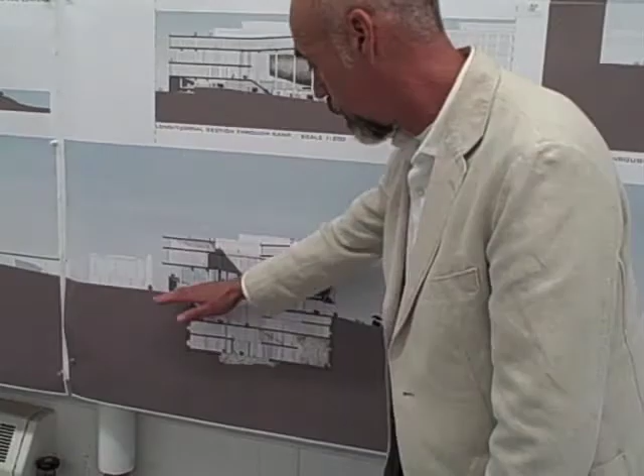After it is designed, but before it can be occupied, a building must be constructed. This is the story of the construction of Milstein Hall at Cornell University.

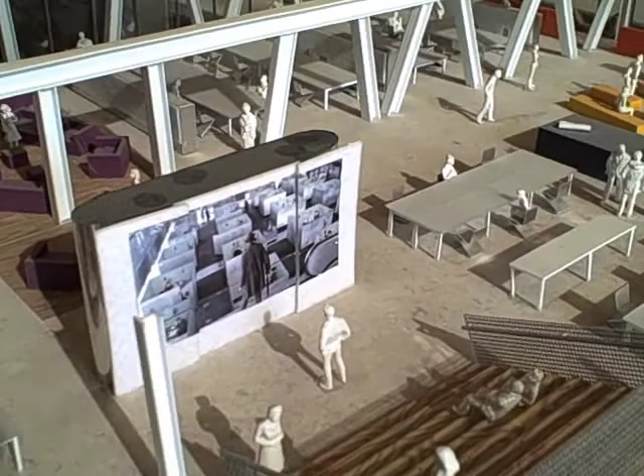The heart of Milstein Hall is the upper-level floor plate devoted almost entirely to the architecture department's design studios. Unlike the concrete lower-level slabs at the first floor and basement, or the concrete dome, the second-floor studio spaces are contained within and supported by a steel frame. The construction of this steel superstructure was described in a prior video in this series.

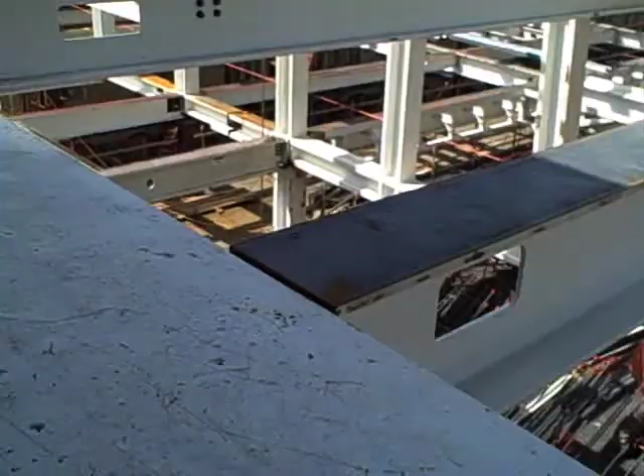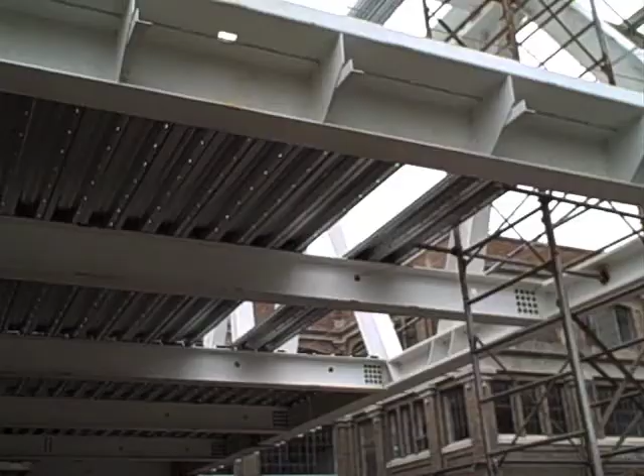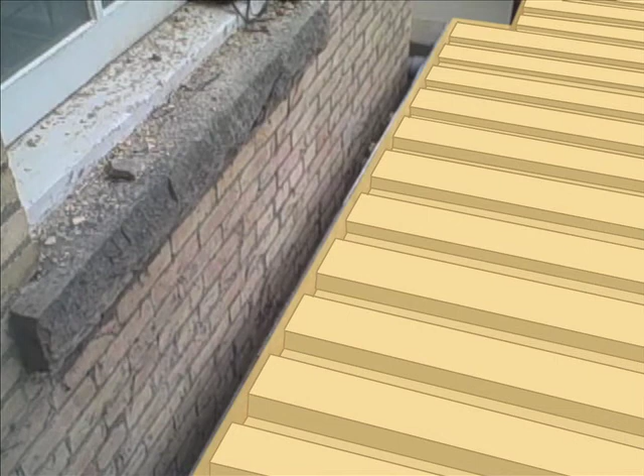To quickly review the process, steel beams, girders, and rigid frame trusses are put in place. Then corrugated steel decking is welded to and made to span between the beams. Welded steel plates are fastened to the steel beams to form vertical edges to the corrugated slab. Otherwise, the concrete cast on top of the deck would not be contained. Notice that there is a substantial gap between the edge of the Milstein slab and the wall of the existing building in order to allow for movement.

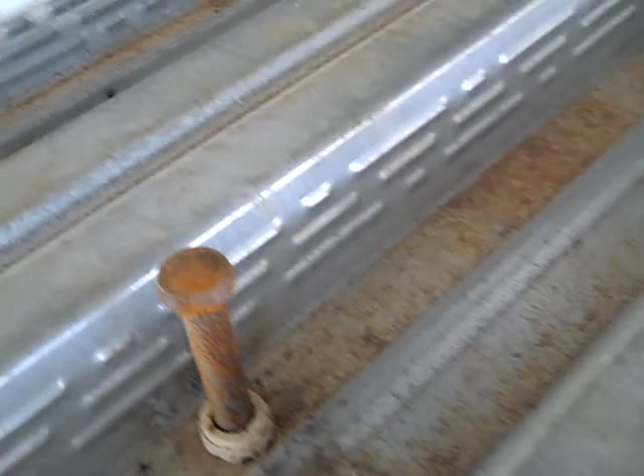Shear studs are welded to the girders and beams through the steel deck so that these steel beams become integral with and can act compositely with the concrete deck. In other words, the concrete above the beams becomes part of the beam or girder profile, increasing its strength in bending and its resistance to deflection.

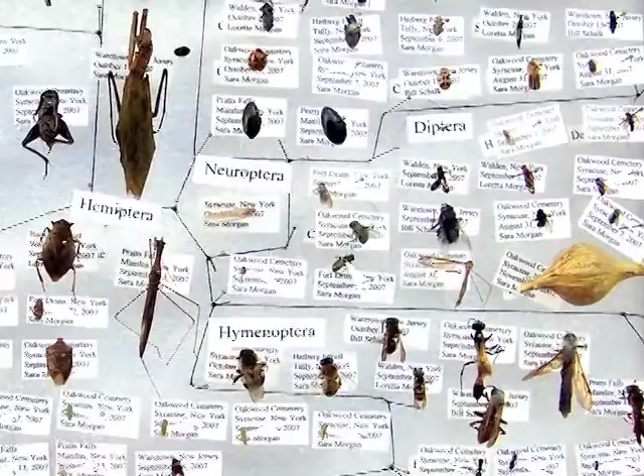While the steel floor structure is for the most part hidden by the building's cladding and soffit material, it is not entirely forgotten. Glass fascia panels at the rectangular floor opening for the stair reveal these girders, beams, and bolts in all their utilitarian and pragmatic glory. Even ordinary construction details get their 15 minutes of fame. Unfortunately, these open glass panels can also trap moths and other creatures, potentially turning this exhibition of structure into an entomological display case.

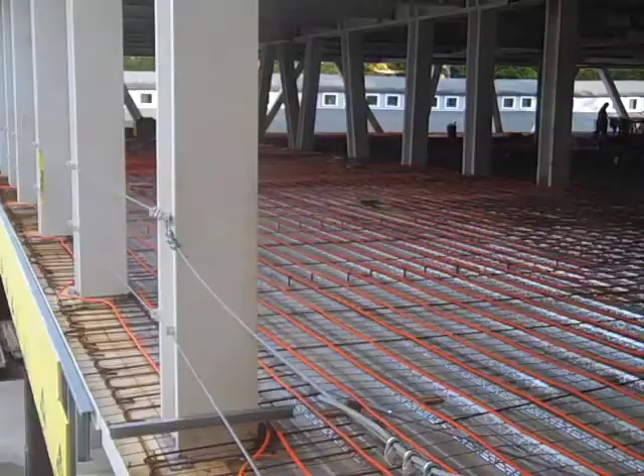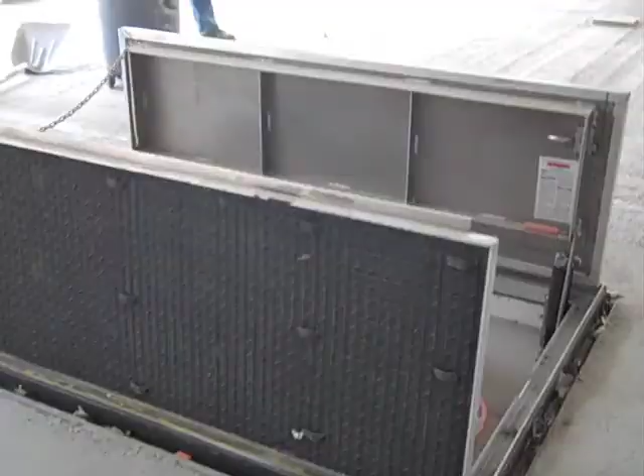This floor also functions as a radiant slab for heating during cold weather. For this reason, PEX tubing, made from cross-linked high-density polyethylene, or HDPE, that is melted and then continuously extruded, is used to bring heated water into the slab. It is placed over the metal deck and will be embedded within the concrete. These tubes terminate in manifolds that are accessible through steel doors built into the future concrete slab. Here we see the access panel box from the bottom, looking up from the first floor. Electric conduits, floor-mounted electrical outlets, and hard-wired data cables are also placed over the metal deck.

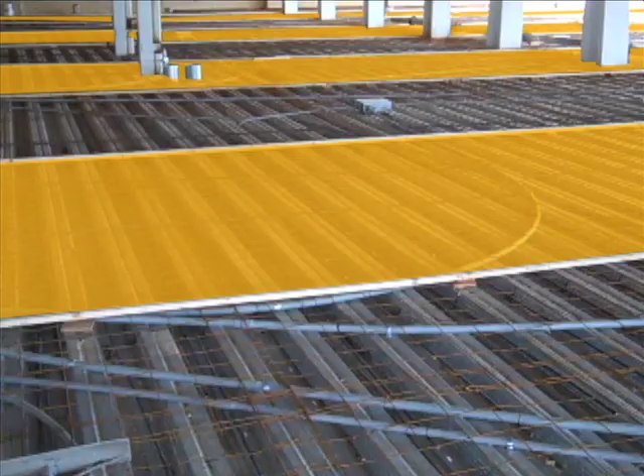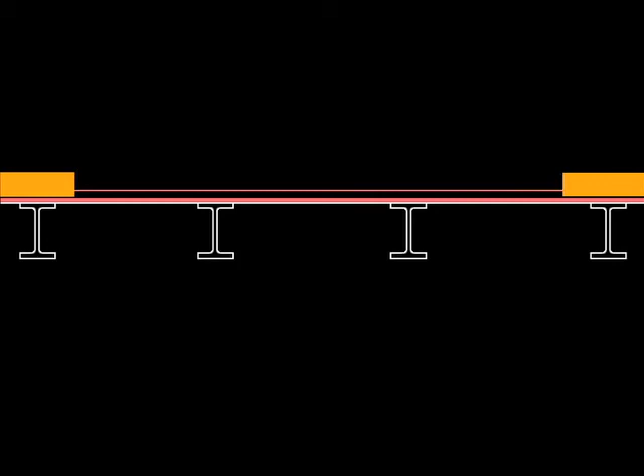Once all these electrical and mechanical elements are properly positioned, concrete is cast over the metal deck in alternating bands defined by temporary wooden edge forms that are aligned at the precise height of the structural slab. The first batch of alternating concrete bands are cast. Once they harden sufficiently, the wooden forms are removed and the edges of the hardened concrete serve as forms for the remaining bands. Looking through the window from Sibley Hall, we can see the concrete being pumped onto the second floor and manually spread over the steel deck.

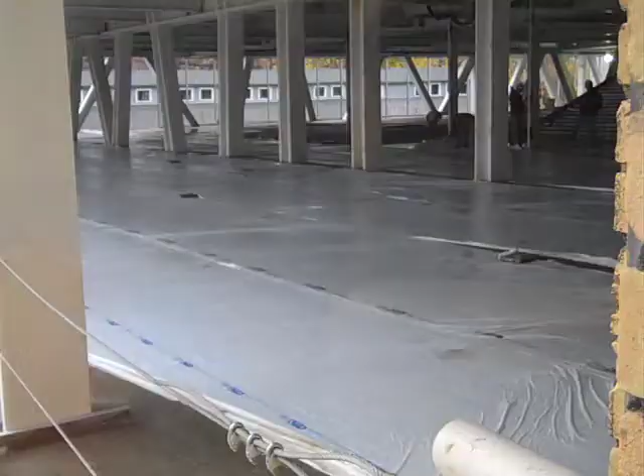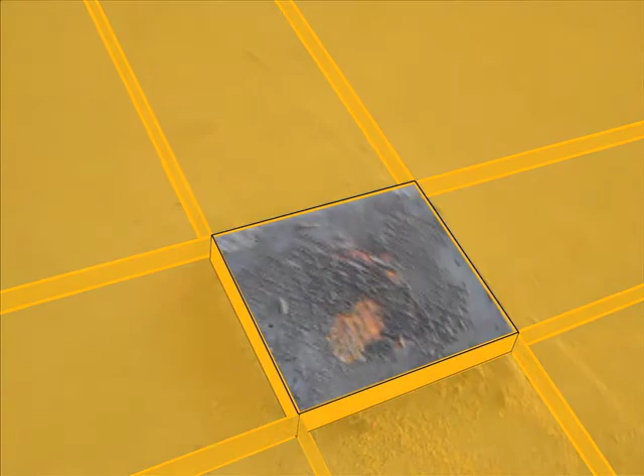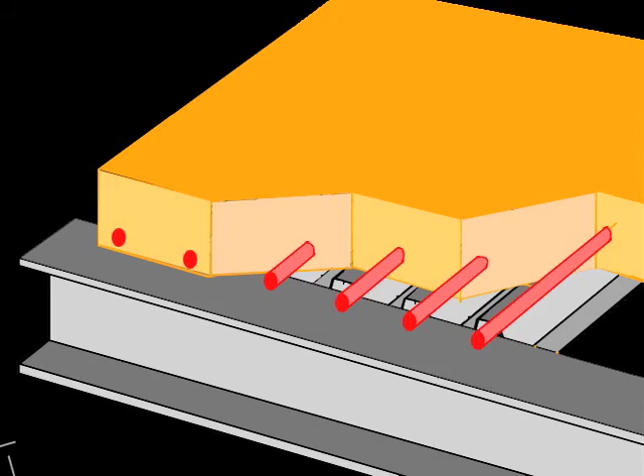A temporary vapor barrier is placed over the concrete to prevent evaporation of water as the concrete cures. The access doors for radiant heating, as well as floor-mounted electric boxes, are a bit higher than the structural slab since they align with a topping slab not yet cast. The steel deck serves not only as formwork for the concrete, but also as tension reinforcement. In other words, neither the concrete nor steel by itself could adequately support the anticipated floor loads. However, the interaction of the two materials creates what is essentially a reinforced concrete slab, with the steel deck taking the place of reinforcing bars.

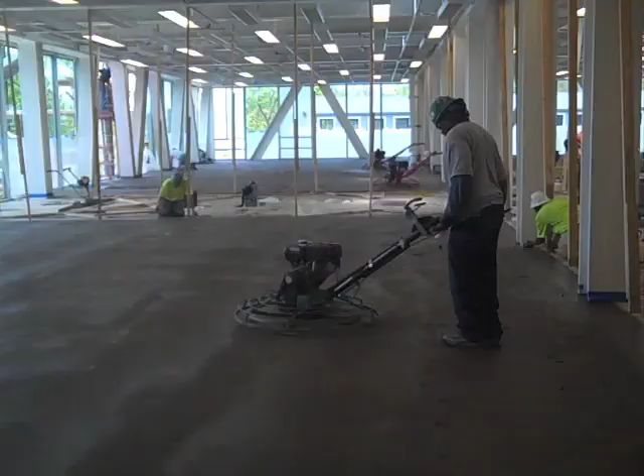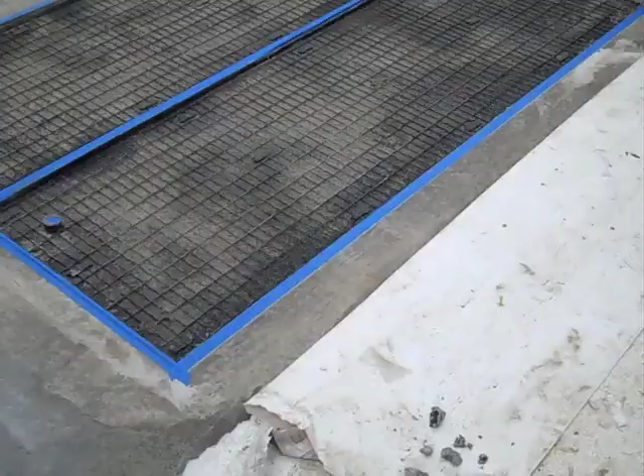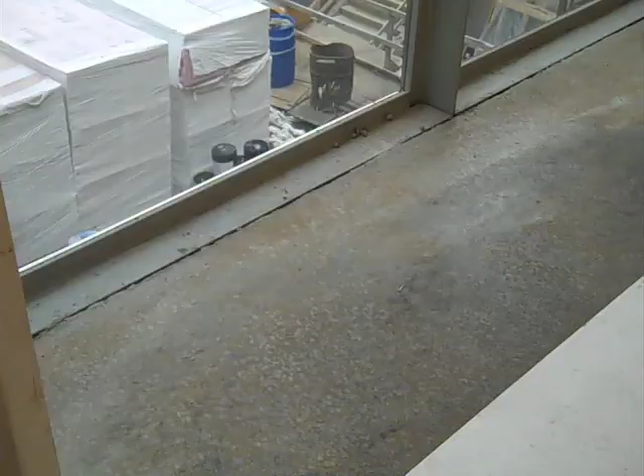Steel welded wire mesh is put in place for the lightweight topping slab, as it was placed in the structural slab below to prevent cracking due to concrete shrinkage. This topping forms the final and finished floor surface for the studio floors. The surface is finished with a power trowel and will eventually be waxed once all the construction on that level is completed. A more specialized topping product, Ardex K15, is placed into the access panels for the radiant heating tubes so that the floor surface seems more continuous. The space between the concrete slab and steel curtain wall framing is filled with a gray sealant. The topping slab, while reinforced, has no control joints, and it has experienced extensive cracking, especially at sharp corners.

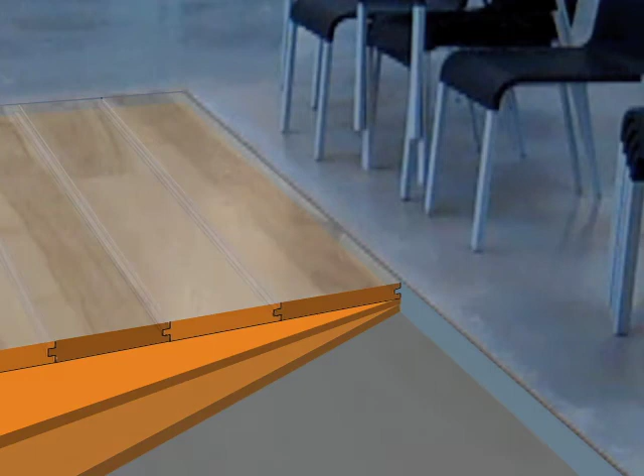One area of the floor plan, designed as a kind of lounge area, will be finished with a wood floor. The wide planks of ash are screwed into 2 layers of plywood, which act much like the subfloor in conventional wood-framed construction. To allow for expansion and contraction, the space between the wood and concrete finished surfaces is filled with cork. As often happens when very wide planks are used, the wood exhibits considerable cupping, as can be seen here.

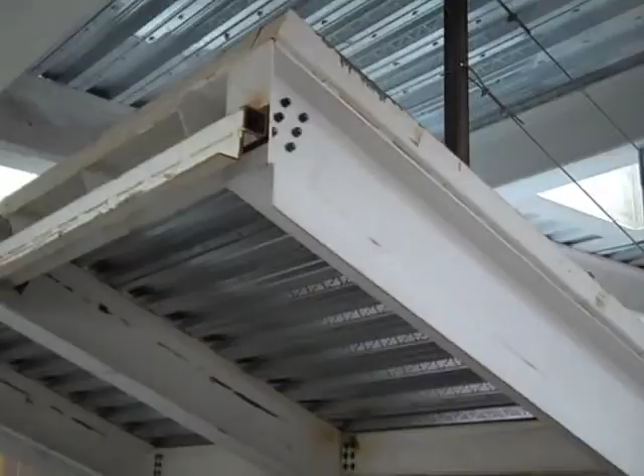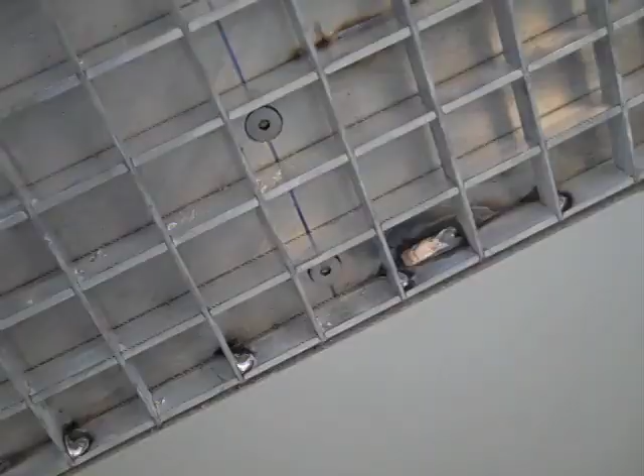This area aligns with a stainless steel covered electrical closet and a small sloped seating area directly over the dome below. The sloped seating area facing this projection screen is first cast as a simple inclined slab on its steel frame. The actual seating is formed with wood, and the edge is lined with aluminum panels. Later, an aluminum gridded egg crate guardrail is screwed into place. An aluminum plate welded to the aluminum egg crate is bolted to a steel plate that has been welded to the steel structure of the inclined plane.

A similarly exposed system of bolted plates is used to attach handrails to the inside plane of the aluminum grid. Unfortunately, this aluminum gridded guardrail didn't really work that well. It was a bit too flexible, and so it was removed during the 2012 winter intersession and replaced with a welded steel version, painted white.

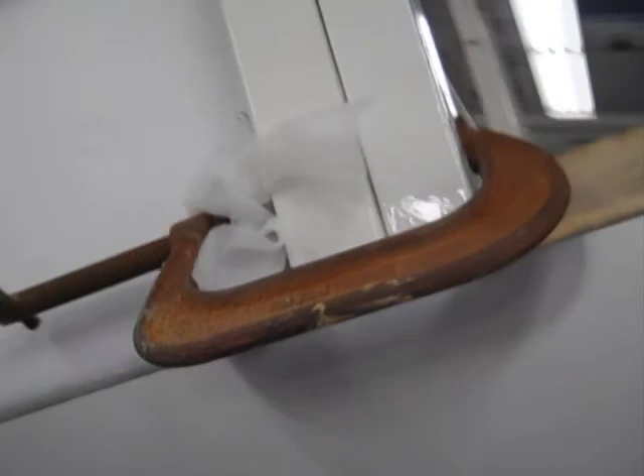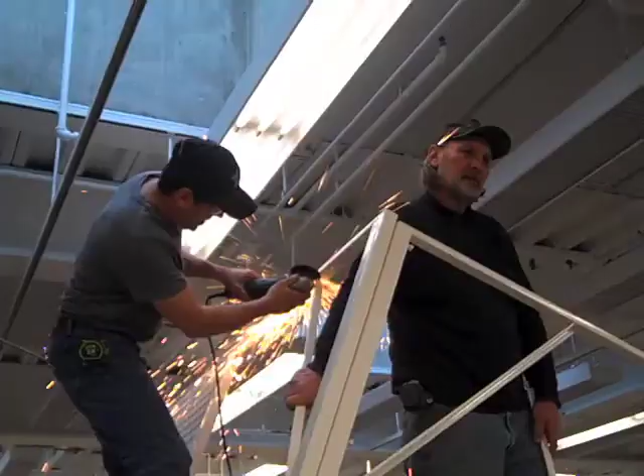This steel frame, temporarily held in place with clamps, will be welded to the same steel plate to which the aluminum structure was previously bolted. Then, painted steel gridded panels will be bolted into these steel posts. Diagonal struts that maintain the desired geometry of the steel frame are cut off once the frame is in place.

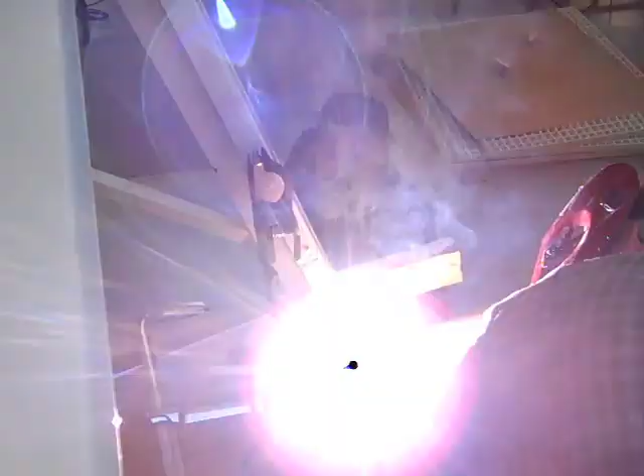The gridded panels are lifted into position and bolted into place. Sometimes the holes need to be enlarged so that the bolts can be made to fit properly. Once the panels and posts are aligned and fitted, the posts are welded in place. The old aluminum handrail is then bolted in place, and, after a bit of touch-up paint, the new guards are complete.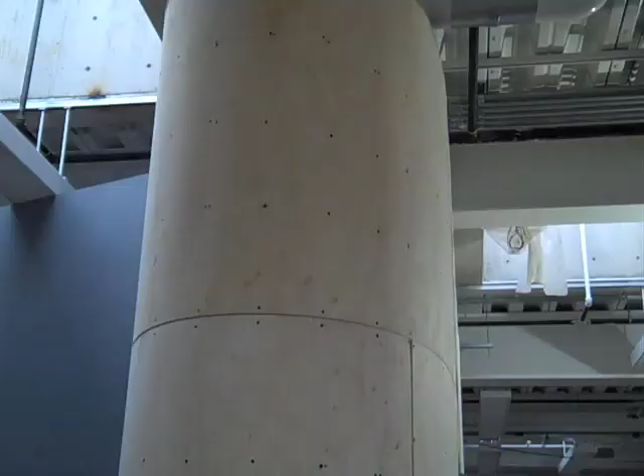The electrical closet is constructed with metal studs and plywood sheathing. Then, polished stainless steel panels are glued to the sheathing. Doors facing the sloped seating area can be opened to create a projection screen. This screen faces the sloped seating.

Aluminum panels are fastened to the inclined steel structure, and glass walls and doors provide acoustical separation from the auditorium below. At the time of this filming, the joints where the aluminum panels intersect seem a bit sloppy. This detail is on a so-called punch list, that is, a list of items not meeting the requirements of the drawings and specifications that will be fixed by the contractors once students leave for intersession. Here we see the corrected detail, a bit better than before, but still not perfect.

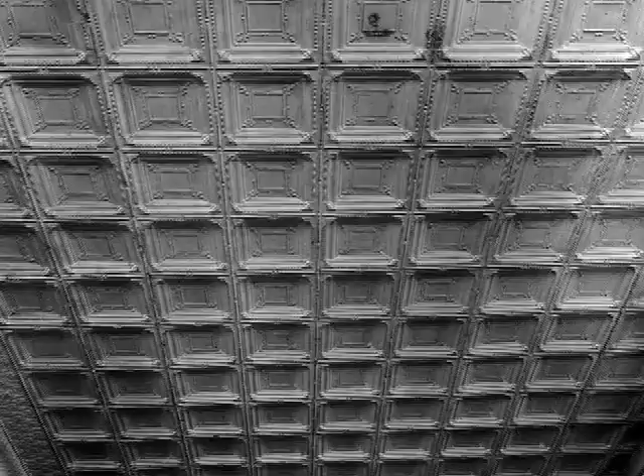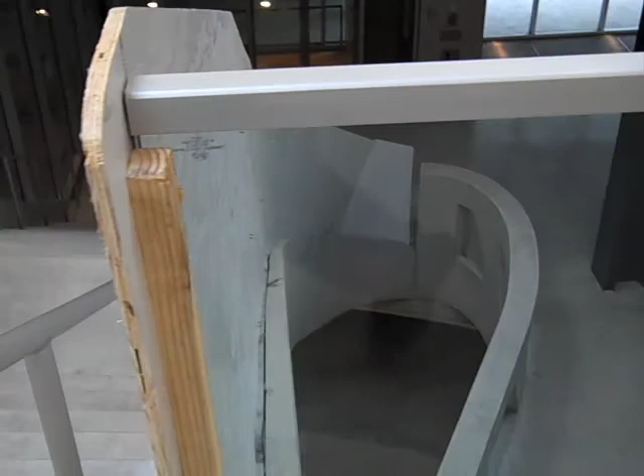Stamped aluminum panels, resembling a 19th century tin ceiling on steroids, form the underside of the sloped plane, matching the ceiling treatment on the auditorium below and the rest of the first floor soffit. Glass guardrails set into aluminum channels protect the openings around the entrance stair, with plywood standing in temporarily for some missing glass.

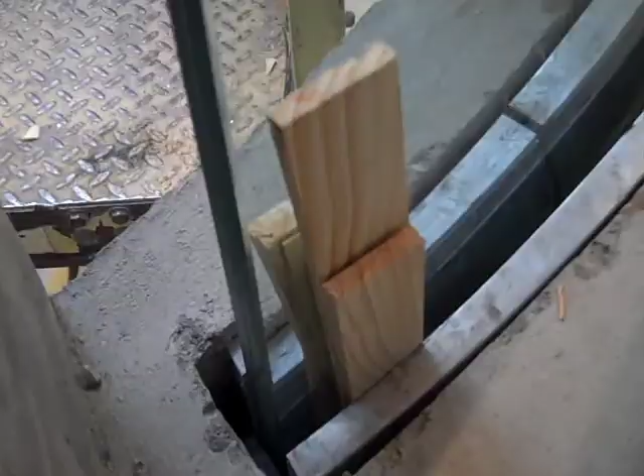Here we can see the installation of curved and sloping glass guards for the stair leading up to the studio floor. Temporary wooden shims are used to align the glass panels within the aluminum channels. Other ad hoc methods are also employed for this purpose. While ordinary shims and gaskets are used for the standard straight glass guards, the curved ones require a more handmade approach.

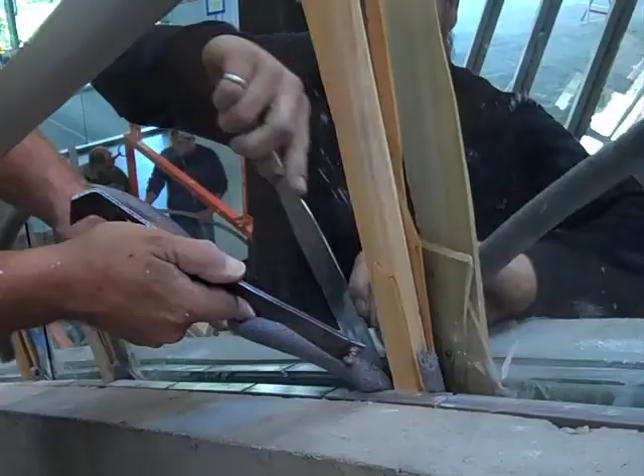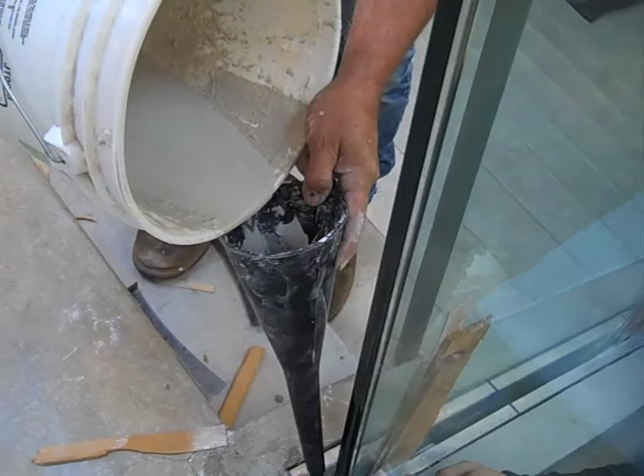After a backer rod is inserted into the floor-mounted channel and the glass is pushed into place using scraps of wood, an anchoring cement is mixed and then poured into the floor-mounted channel to secure the glass. Then, the aluminum channel cap is painstakingly cut, ground, and bent by hand until it fits the curve of the glass. A black sealant is used instead of the standard black gasket, and an aluminum strip and gray sealant finishes the job.

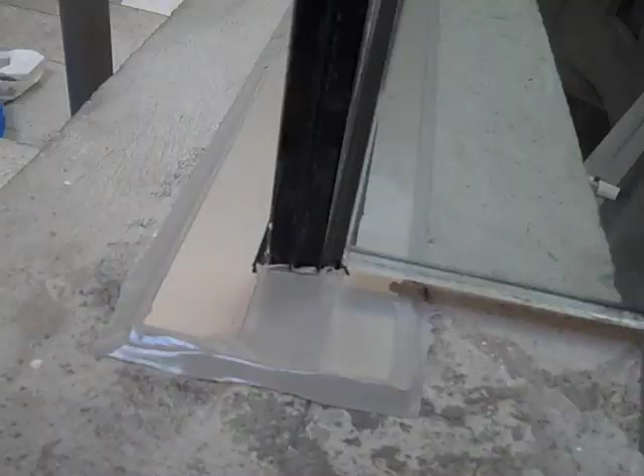Another type of guardrail shows up under the sloping truss diagonals, necessary and required by code so that building users don't hit their heads on the angled steel truss sections.

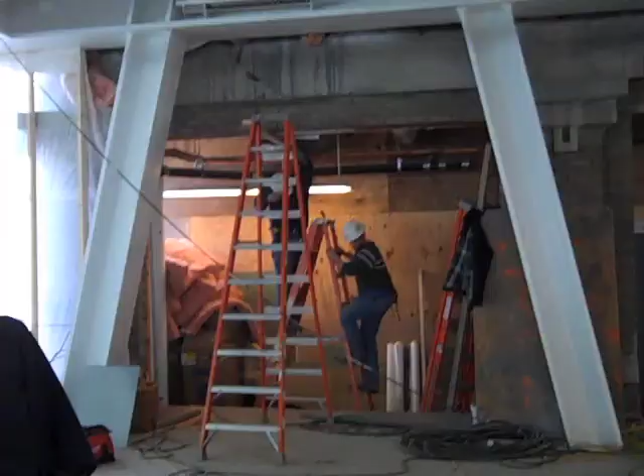Because Milstein Hall is meant to connect East Sibley and Rand halls on their second floor levels, openings must be made through the masonry walls and windows of these two existing buildings. Here we can see the opening being made in Rand Hall. Because it is a steel-framed building, the thick brick cladding can be removed without compromising the building's structure. Both a glass wall protected by a horizontally rolling fire shutter and a 1-hour fire-rated glass door are then installed.

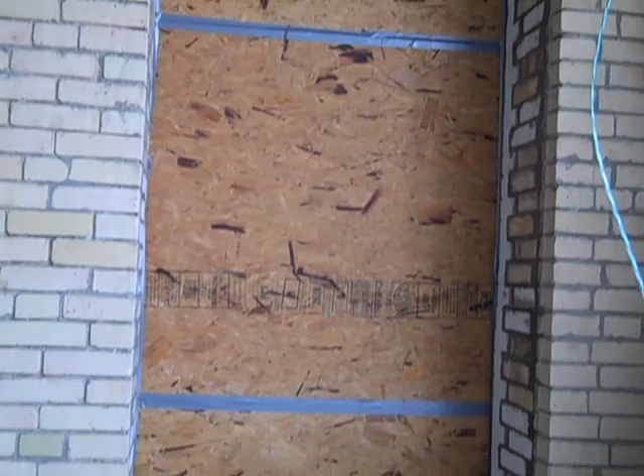At Sibley, an older structure with load-bearing brick walls, two strategies are employed. Mostly, a series of small openings are made by removing brick below existing windows. This minimizes structural disruption to the wall since the windows are already spanned by brick arches. New glass doors with 1-hour fire resistance ratings are placed in these openings.

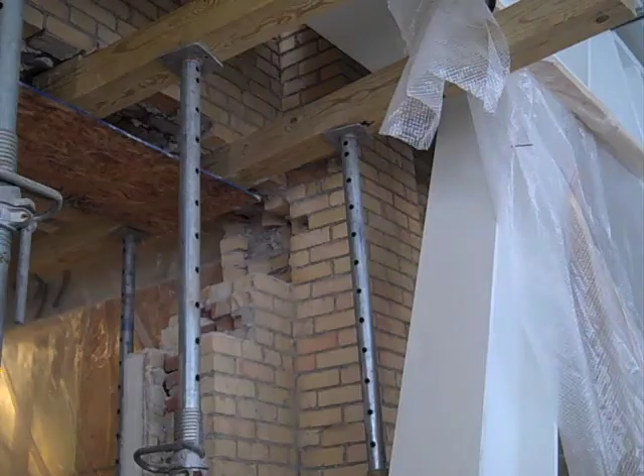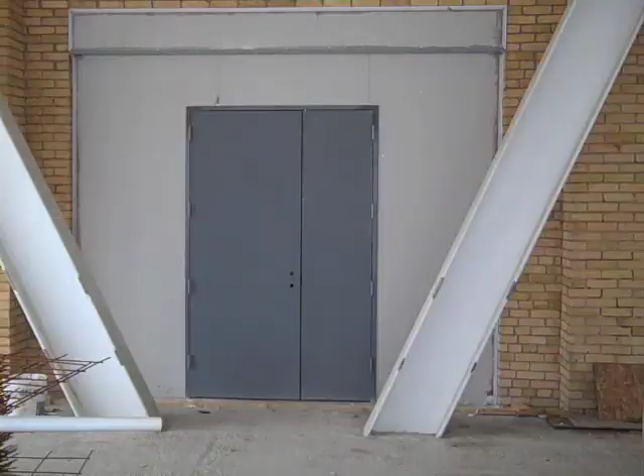At the end of Sibley, a more difficult opening is made in the brick wall. Temporary shoring supports a new, larger opening until a steel lintel can be inserted. After all this effort, it is a bit surprising to see the result. A small steel door is installed within a steel stud gypsum board wall. I've been told that the double-wide glass door that was originally envisioned proved to be too costly and so was replaced with this lower-cost design.

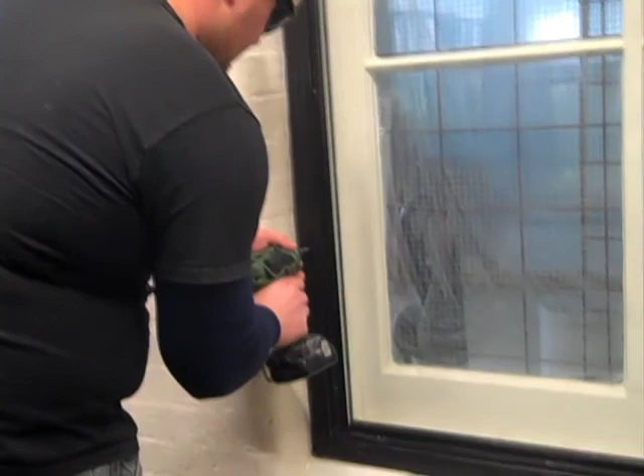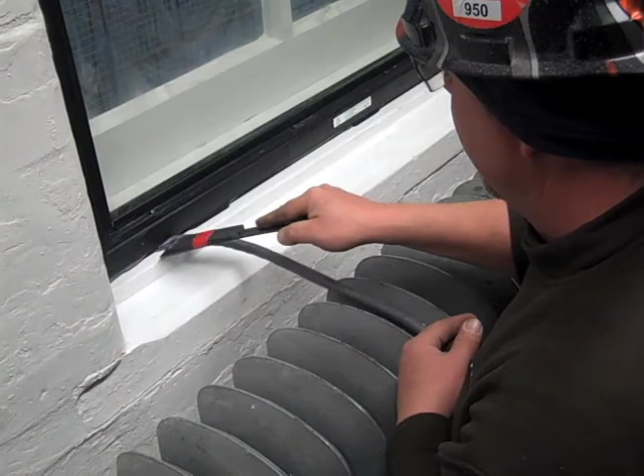To create a 1-hour fire barrier between Sibley and Milstein Halls, the existing windows that are not extended into doors are covered not with 1-hour fire-resistive material, but with 3/4-hour fire-rated glass in a metal frame that is screwed into the existing wooden window frame. Here we see fire-safing material inserted into the space between the glass frame and masonry walls to ensure the continuity of the fire barrier. This fire-safing is then covered with a sealant. Finally, the new fire-rated glass is cleaned.

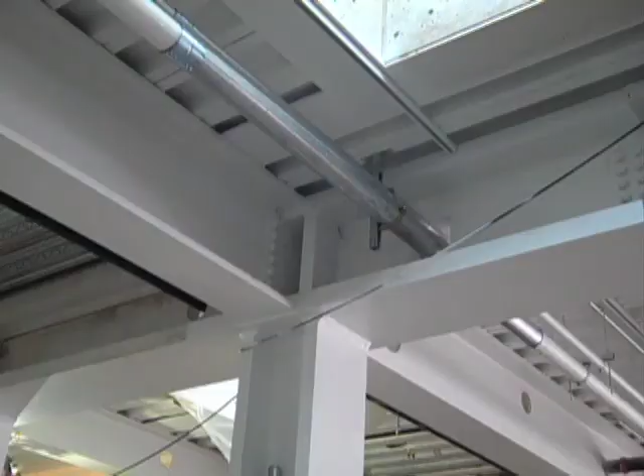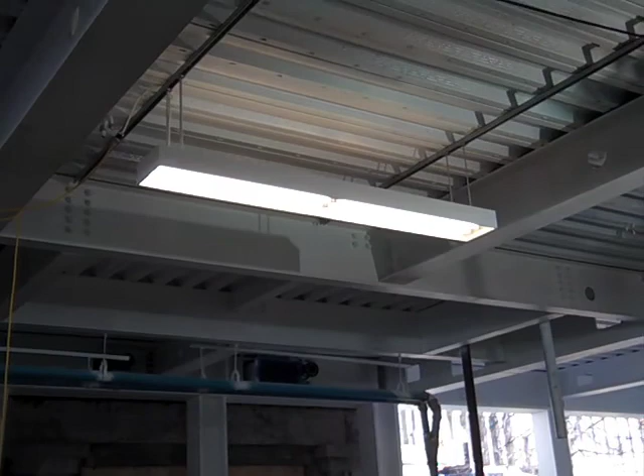That's pretty much it on this floor level. The ceiling is just the exposed structure and skylights, along with electrical lighting, pipes for chilled beams and sprinklers, and some ducts for fresh air. A mock-up of the lighting is shown here, fastened to the same unistrut channels that will support chilled beam units.

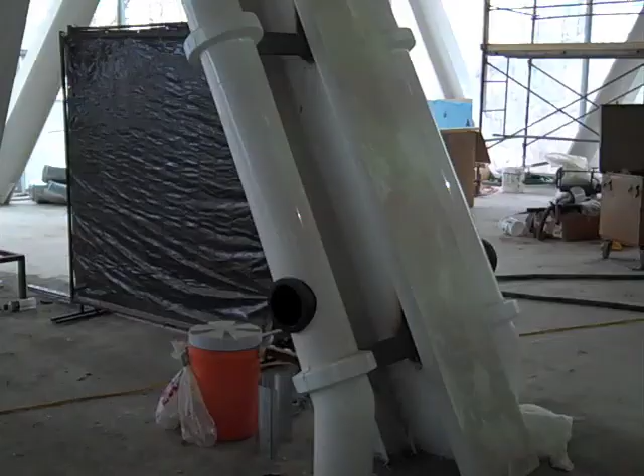The chilled beams and their pipes for cold water can be seen here, along with lighting fixtures that are the same size and shape as the chilled beams. There are also insulated roof drain pipes running exposed through the second-floor space.

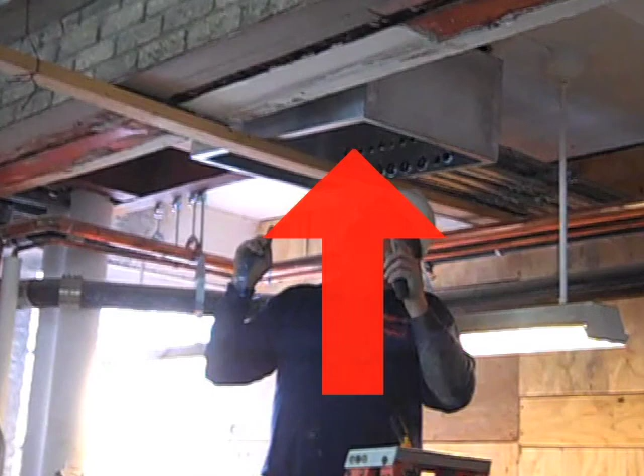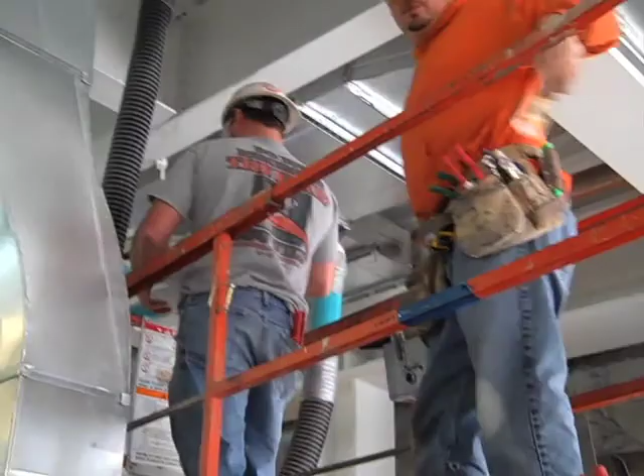With this plan, none of the ducts need to actually penetrate through the open studio floor, with one exception. A toilet exhaust duct from the lowest level needs to work its way up through the building somehow. A space for this duct was found adjacent to the elevator shaft.

Electricity and data are brought to the workstations in 2 ways. Data and power are supplied from floor-mounted boxes that were embedded in the concrete slab. More power is available from electrified tracks suspended from the ceiling into which wires can be plugged. There are also wireless access points mounted in the ceiling.

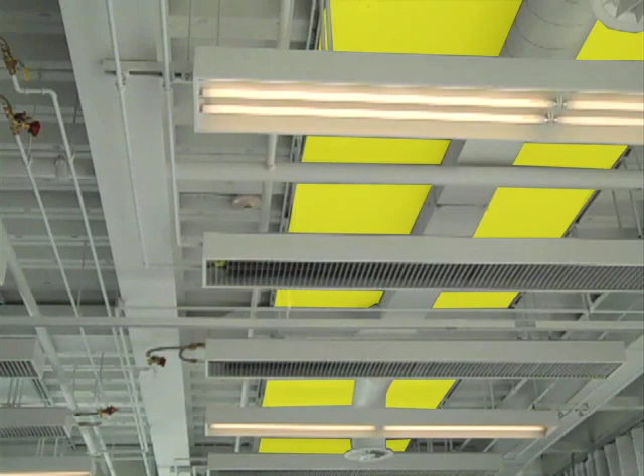The structure and mechanical electrical systems are entirely exposed, except that acoustical panels have been fastened to the underside of the exposed metal corrugated roof deck to make the space less reverberant and to attenuate noise.

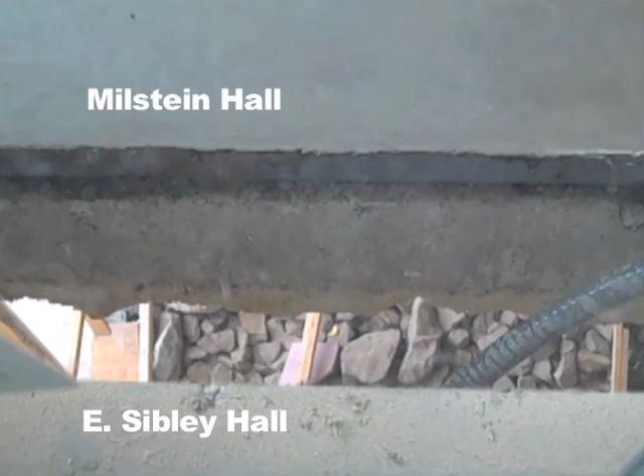There needs to be a substantial space between the new and existing construction, since the structural frame of Milstein Hall is designed to be entirely separate from the structure of the existing buildings, and sizable differential movement could occur as a result of wind or earthquake loads.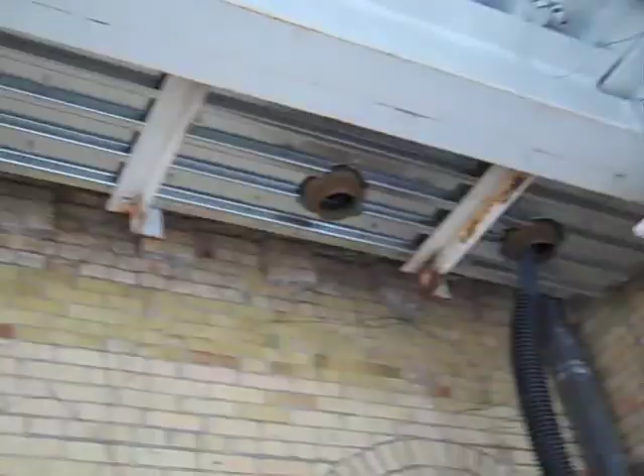At the ceiling level, horizontal framing studs are hung from the structural slab to support aluminum panels, forming a soffit that covers the somewhat messy condition above, in this case accommodating a continuous gutter below the level of the roof deck designed to collect water not absorbed by the green roof.

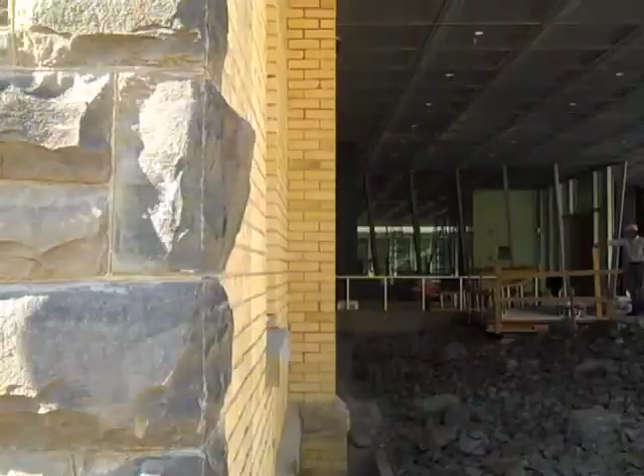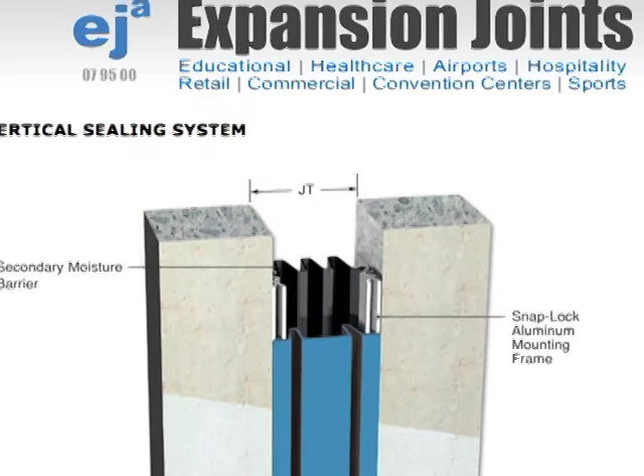Vertical building separation joints are also needed between Milstein Hall and the existing buildings it connects to at this level, in this case East Sibley Hall. Typical proprietary seismic joint details consist of rubberized bellows that can expand or contract as the two buildings move during a seismic or wind event. Here we see the bellows installed between Milstein and Sibley Hall at the southern facade.

The New York City-based design firm 2x4 Incorporated was hired to create a signage system for Milstein Hall. They used cutout letters and figures that are adhered directly to the concrete slab. First, an adhesive primer is applied to the concrete. Then cut-out thermoplastic letters and figures are placed over this adhesive. Finally, the whole thing is made permanent with a blowtorch.

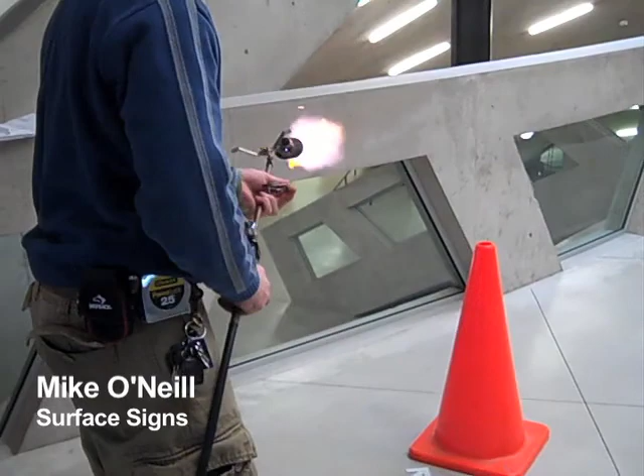Green letters are used at the entrances to the space being labeled, while white letters with arrows are used to point you in the right direction.

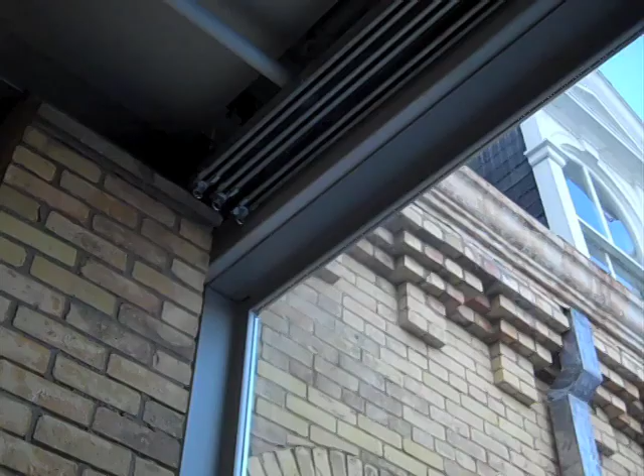The last elements that define the studio level are curtains that provide some protection from the east, west, and southern sun. These curtains, designed by Petra Blaisse and her firm Inside Outside, are hung from tracks mounted to the ceiling structure. The curtains, when drawn, obscure the steel rigid frame trusses, so a decision must be made whether to place them on the outside of the trusses so that the trusses remain visible from the inside, or on the inside of the trusses so that the trusses remain visible from the outside. As it turns out, both strategies are used.

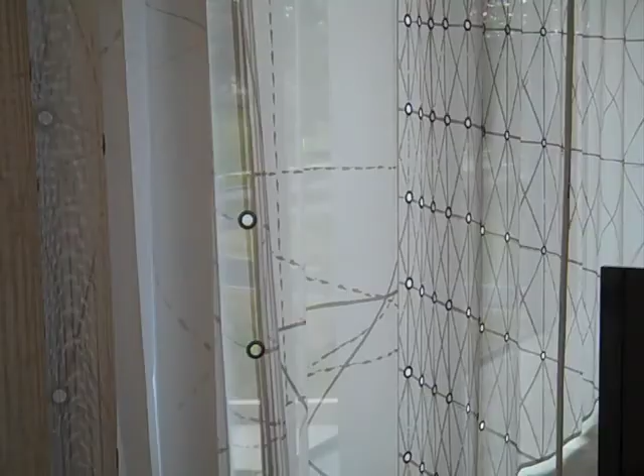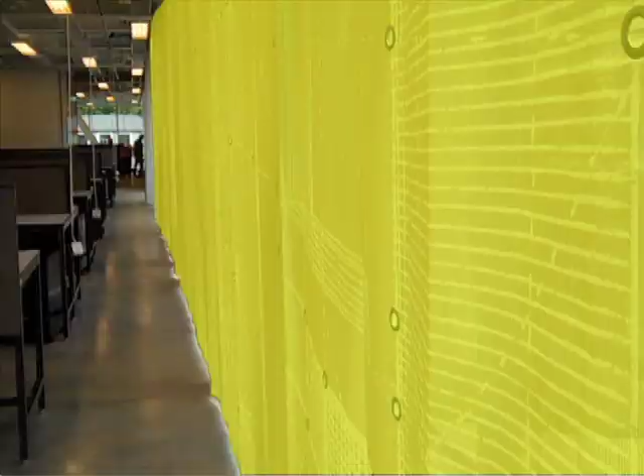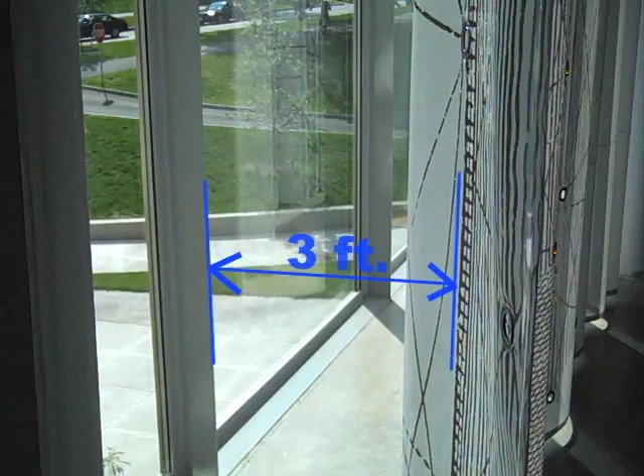The western facade curtain tracks are placed between the curtain wall and the trusses, leaving the steel frames visible from the inside but not from the outside, while the eastern curtains are moved further inboard so that the trusses, while obscured from the inside, remain visible when viewed from the outside. Why would only these eastern curtains be placed inside the trusses? A seemingly irrational choice, since it effectively reduces the amount of available floor space while inviting all sorts of forbidden activity. In fact, the explanation has two parts.

The first part is a site strategy that embraces the metaphor used by Cornell in its original competition brief, that Milstein Hall be designed as a gateway to the campus. In other words, the view of and approach to the building from North Campus is acknowledged as being more significant. The second part is best understood as a relic of architecture's male-dominated modernist legacy and the stereotypical gender roles that were traditionally assigned to the various building elements.

So when we approach Milstein Hall from this prioritized vantage point, this gateway from North Campus, the trusses with their hyper-extended cantilevers are brought to the foreground in a classic display of heroic and masculine posturing, while the curtains, assuming the traditional role of the feminine and domestic, are pushed into the background.